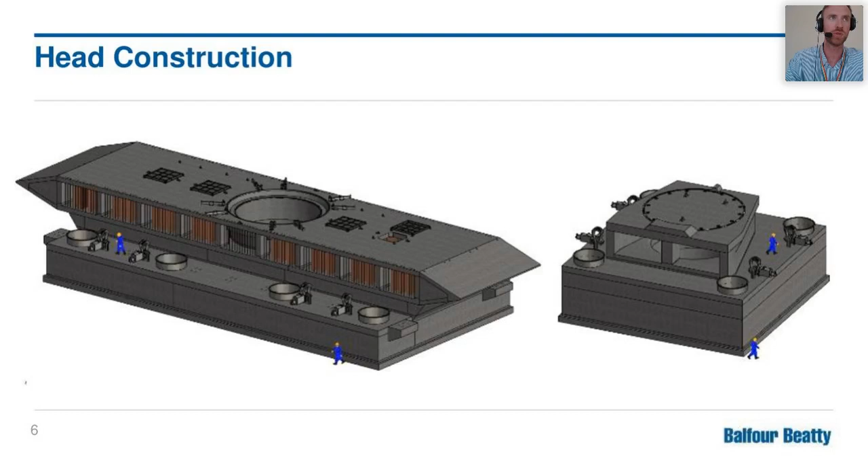So we just have the simple task of building these in the docks in a facility, and then picking them up and moving them 30 nautical miles and landing them precisely in position offshore in the Bristol Channel. Easy peasy, there you go. That's what we're here for.

Ultimately the head will sit on the seabed and the shaft will be drilled through and connect into the tunnel, which is being dug at the minute underneath the channel by a tunnel boring machine. And that will provide the source of water to generate power in the nuclear facility.

I like to tell everyone that it's the most important piece of the whole puzzle, because you can spend all the money getting everything right onshore, but if you don't get any water to it, you can't generate electricity. So I've got the most important job.

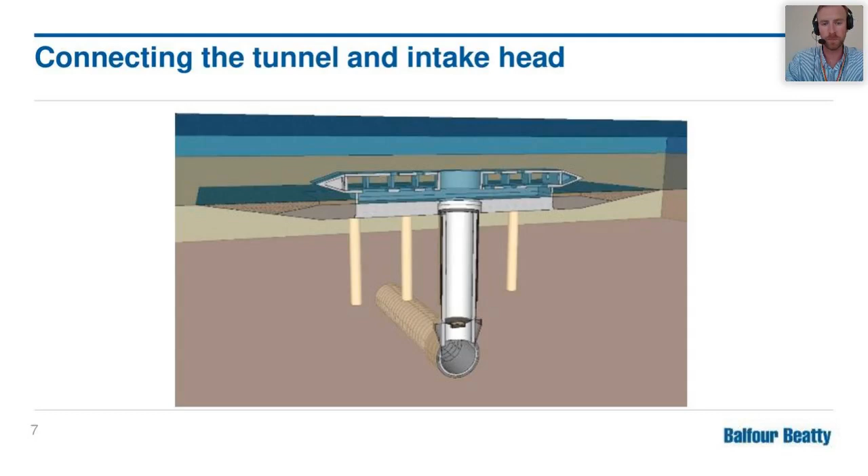What that information is telling us is the old-fashioned way of telling us how to build the structure. Really, from that drawing, we looked at it and thought, that looks difficult, but we can't quite picture what that is and how you build that. So straight away we were having concerns and doubts that the information given to us would allow us to even build the project to the desired specification.

So we went on a bit of a learning curve ourselves and employed some specialist companies to provide this information in a 3D format, producing a 3D model which allowed us to visualize the problem at hand.

It also allowed us to understand that these structures, the intake heads and the outfall heads, are individually made up of over 120,000 different components, which when pieced together all clashed with each other in up to, I think, 20,000 locations on the outfall and around 50,000 locations on the intake. So in effect, every bit of metal you lay down would clash with another bit of metal.

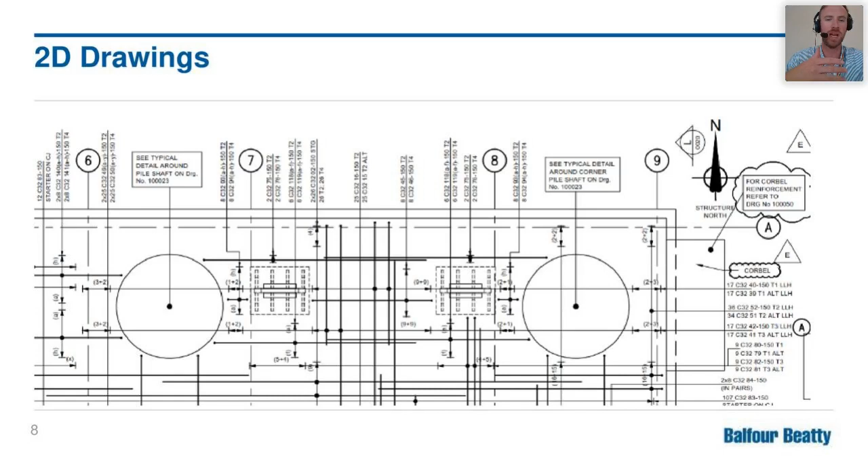So that is invaluable information. It is the first thing we did, which really helped us overcome the biggest challenge, which was making something unbuildable, buildable.

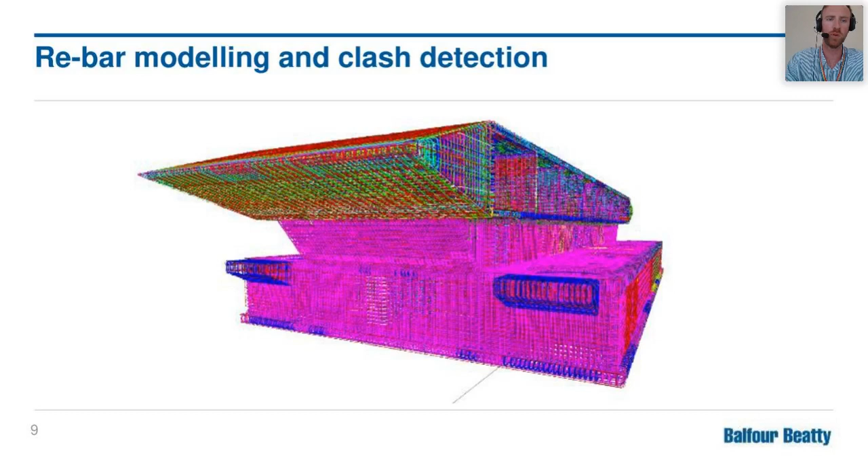So the 3D model has been produced. That's declashed everything, that's allowed us to make something buildable. We then produced a set of 2D drawings from the model, which were more accurate and fully reflected a buildable job.

This was so that the less tech savvy people, the older generation, actually had an opportunity to build the job - they were not too au fait with working from iPads and tablets, they wanted the more paper-based approach. But the model is there, and it's allowed us as a reference tool to help understand and visualize difficult parts of the job.

We've got big TVs on site, and all of the engineers and supervisors have tablets with them, with the model. So when all the drawings are laid out on the table and you can't visualize something, they just take the model, put it on the screen, and brief the workforce, showing them what it's going to look like when it's built. That's really very useful.

We have also made our quality assurance system go paperless. A normal office would have hundreds and hundreds of bits of paper stacked up on desks, which can easily be lost. We've turned this into... well, it's disappeared. That is non-existent now. That is archaic.

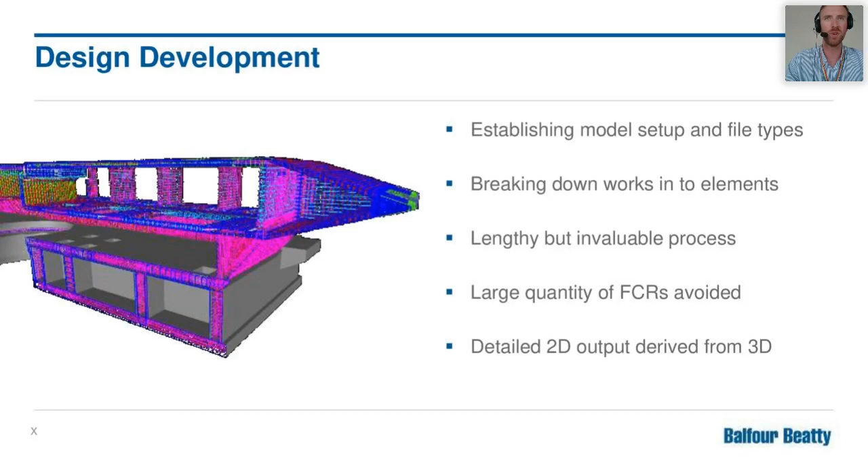What this did was avoid a large quantity of FCRs. FCR for us is some jargon we use, but it's basically a field change - every time you're building something and you come across a change, that's a delay, that's a cost. So by spending this money up front, we've really avoided delays to our program on site, and it has allowed us to successfully deliver large elements of the work to program and to a budget that we all believe in.

So on site, how does this all work? How does it come into reality? We've already said that the 3D model has been reviewed up front with the supervisors, and we've established how we're going to build the job - that's how we've designed it. From this, we can plan works most effectively. We can produce a program and stand by it, saying over the next few weeks we're going to build this floor slab, this wall, and this roof in this sequence.

Lots of desktop studies are produced - visualizations, fly-throughs, 4D simulations, and also paper-based items we call flick books, where you can almost flick through like you're building a Lego model or some kind of Airfix set, seeing step by step where you put this part. Part 1 goes next to part 2, part 3 goes next to part 4. I've never seen that before in any job, and it's very, very useful.

As I've mentioned earlier, the supervisors on site have tablets for visual aids, and we have site cabins with TVs so you can see the model as well. This is just a bit of an example of a flick book here.

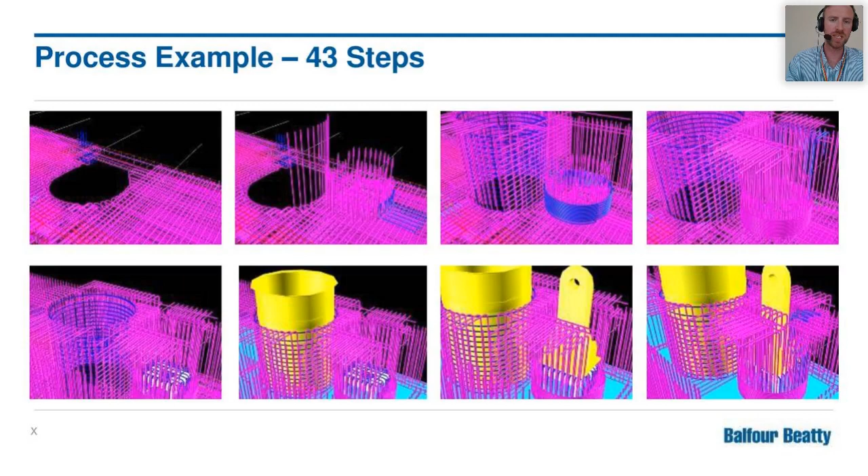So we've cut down the 43 steps into 8 steps, but this is a very complex bit of the works, and you might not really be able to see it too well on the screen, but there are hundreds of thousands of individual bars which all have to be pieced together here. The pink elements are rebar, reinforcement. Then there's some blue circular rings that have to go in, some more pink bars, then a large yellow cylinder that gets dropped in, and a large yellow lifting point. This operation would have taken a number of weeks, but we got this down to a number of days after using this flick book to explain it to the workforce.

We've covered some of this previously, but one of the key things to pick up is it's critical to have some tech-savvy people who understand the benefits of using this model and the possibilities of where it can go, and also to control it and control the distribution so people don't edit it, play around with it, or break it.

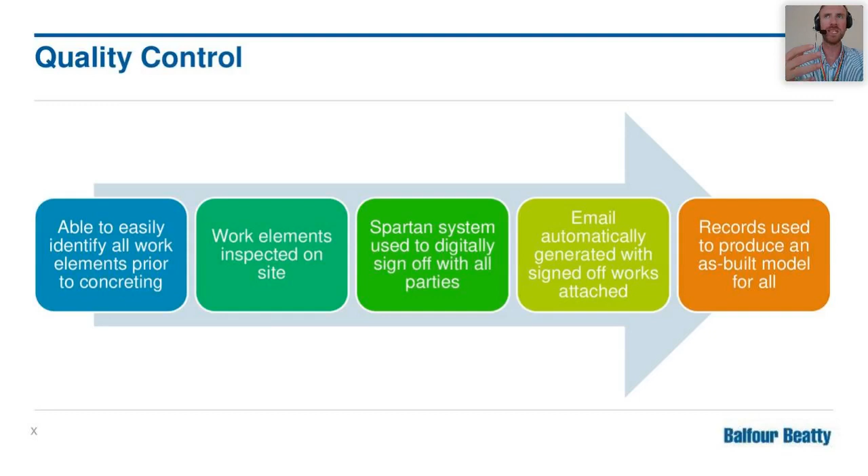The quality control side of things, which I've mentioned as well - we are using the digital quality assurance system, which has a bit of a step-by-step process, but this produces a suite of online database of all of our quality records, and from that we're able to produce an as-built of the model, a 3D as-built of what has been built, which can then be updated and supplied to the client. So this is how they as-built it, and it's kind of a step-by-step.

You can literally go onto the model. Once it's pink, that's what's going to be installed. You highlight everything in green, that's what you've installed, and then the model is updated and it's saved, and that's how it's installed. And then you can actually go through and check that there's nothing missing.

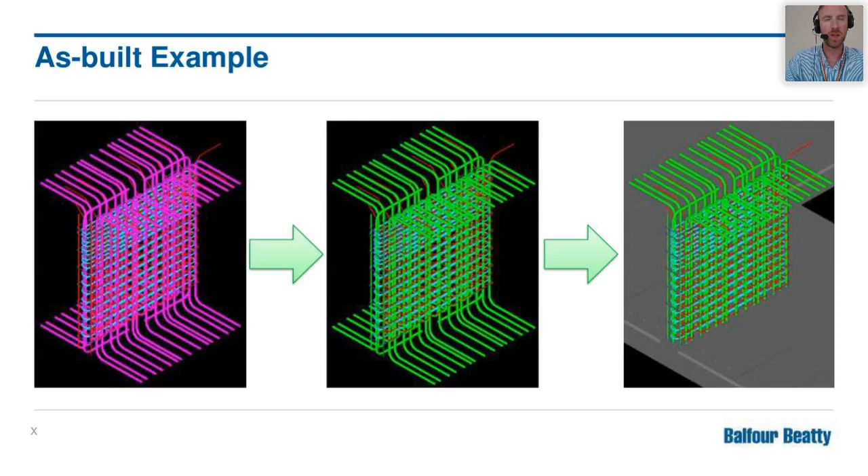This is very important when you've got 100-odd thousand individual components, because every time you install something, you literally click it on the model, it turns green, you save it, and you know you've installed everything. This ensures for us that we're not leaving any latent defects in the structure, which is very important for a nuclear project. We're not missing anything out, and we're not putting anything else in that shouldn't be there. So it's a very, very useful tool for us.

Once you're on the model, you can click onto the element that you've installed, and it will reference the quality check sheet from which you've signed it off on site. So this is another way for us to show a full golden thread of the bars being delivered, installed, checked, and then as-built. This is very useful on a nuclear job, which is very hot on quality assurance and record keeping.

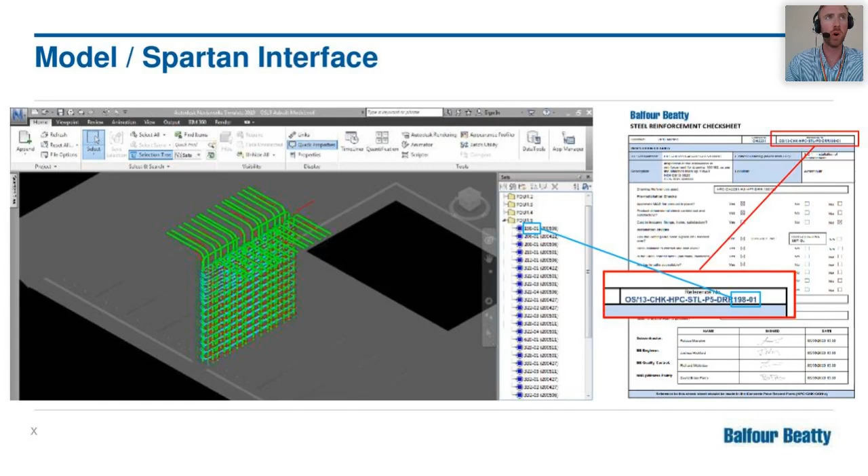So some further innovations. What we've found is we've had a 3D model which is in effect a dumb model - it doesn't move, it doesn't fly around, it doesn't have any simulations to it. But by using that in conjunction with other readily available products on the market like Synchro and Fuzor, we can add some life to it, and we can also use it as a planning tool.

This was flagged up on a 4D simulation 4 weeks ahead of us actually carrying out the works on site. So we realized we needed to adapt all of the temporary works so it didn't clash with our walkways, with our landing loading bays, and with other fixed items on site. This allowed us to do upfront planning to avoid clashes, which would ultimately have arisen on site and could have led to downtime, delays, and cost overruns.

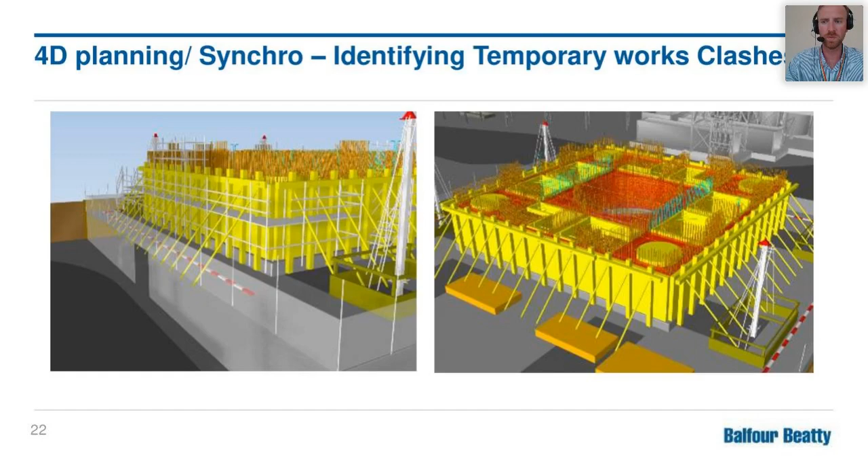So that's just a very simple visualization to explain that. We have also had some areas where there's been tricky access requirements. We obviously have to consider the health and safety of the workforce, and in some areas we were wondering how we'd get in to fix certain elements of the work.

So what we did was a lot of desk studies with 4D simulations to understand how a person could fit in there. Could it be done beforehand, so they don't need to go in there? We tried to run our program through a number of scenarios before building it on site, to avoid clashes, to avoid delays, and importantly, to keep people safe at all times. It's really valuable for that.

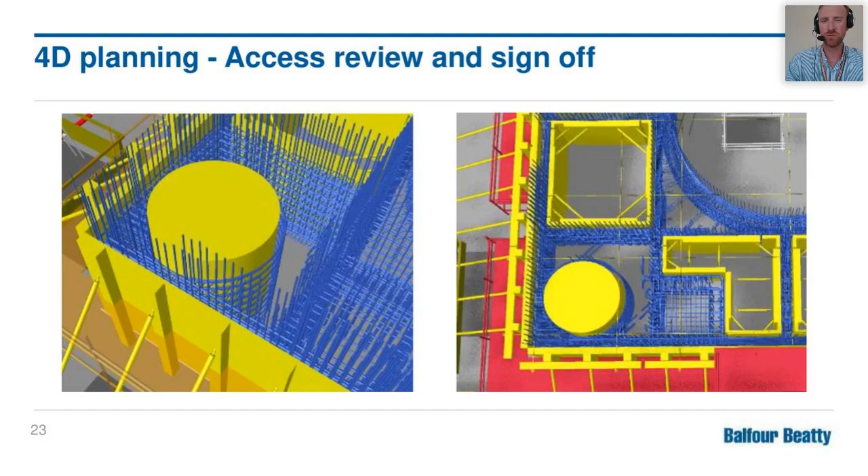This is another example, but one of the key things to wrap up here is we've also been able to use the 3D model and work with ground-based scanning equipment and drone-based scanning equipment to do remote verification of what we've built. Ground-based scanning is readily available from a number of different products on the market, and it can scan the reinforcement or what you've built to a very high accuracy, which can then be verified against the model, removing people from working on site.

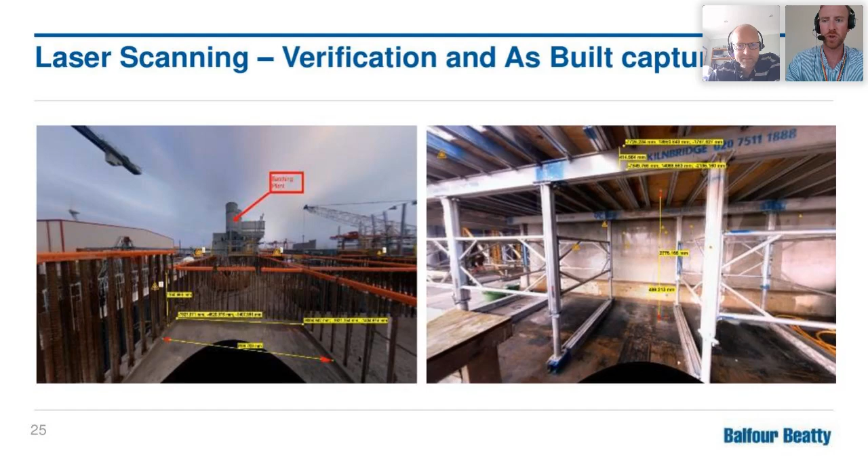That itself is valuable when considering the COVID situation. We've already had the ability to have engineers working from home, not having to come to site just to check measurements, because we've already got a laser scan which can be done with a drone and done remotely. So that itself is a new innovation for us, which we're working on, and I think it's the future.

I'll just go through to the summary, and this is just the last slide here. So to sum up, the 3D model is an extremely powerful tool. It's got a number of benefits.

We've found the outputs from it can be used by non-tech savvy people, but they do still like a 2D drawing to go with it. So having some young, keen and tech savvy individuals and giving them the trust is very, very useful, because they will actually go out, use the model, explain it to the older generation, and make things happen.

Digital QA is highly recommended, I couldn't be an advocate for it enough. Saves a lot of time, a lot of money. 4D modeling has proved very useful. We're still rolling it out in briefings, but we're trying to take it further and fully program everything using it to save us a lot of time and money.

There's great potential in using ground-based and aerial-based scanning technology to verify what has been built remotely, avoiding the need for engineers and staff to be based on site, which is particularly of interest in the current new normal we have here. That for me is it, and I think I'm about up in terms of time now as well. Hopefully I've covered everything, and if there's any questions, great to hear them.

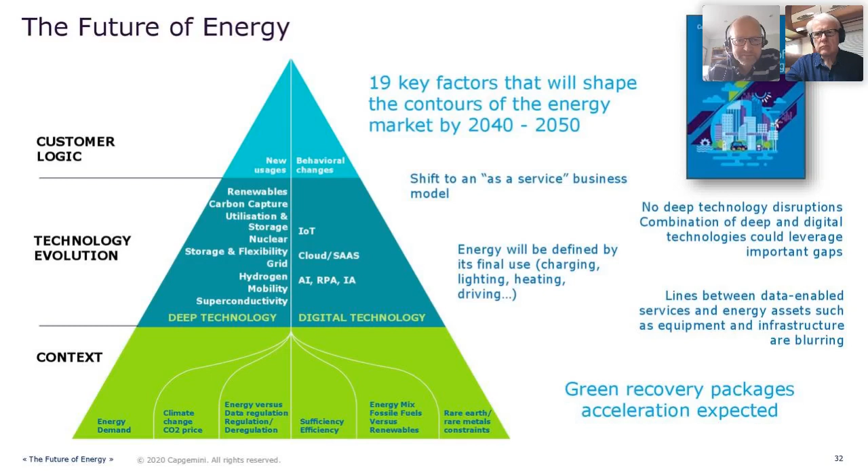Very good, I hope you can hear me. And first of all, thank you for inviting me to be part of this. I'm Gary Carroll, I'm the founder of Episensor, and it'll be a challenge to talk about Episensor in 5 minutes, but let's see what we can do.

So Episensor provides industrial automation using a wireless Internet of Things, industrial IoT platform. Much more difficult than actually designing the products when the company began, finding our position and how we deliver value to our end customers was a huge challenge. So we realized that for the past 40 years, major automation companies that we all know well, the global giants in this area, such as Honeywell, Siemens, Schneider, and Emerson, and so on, have actually done a fantastic job, and they've set the gold standard for how this should happen in terms of accuracy, ruggedness, reliability, security, and large-scale deployment.

And when you move to industrial IoT, it's very important to say that you're not making a compromise, that you're not losing some of what has been available, whereas you might be gaining some flexibility and so on. So we've taken the approach that the gold standard set by these companies over the last 40 years is our starting point, and that you should lose nothing but gain from a different approach. So in a sense, we're not doing anything new from a technology point of view. We're still measuring the same things and so on.

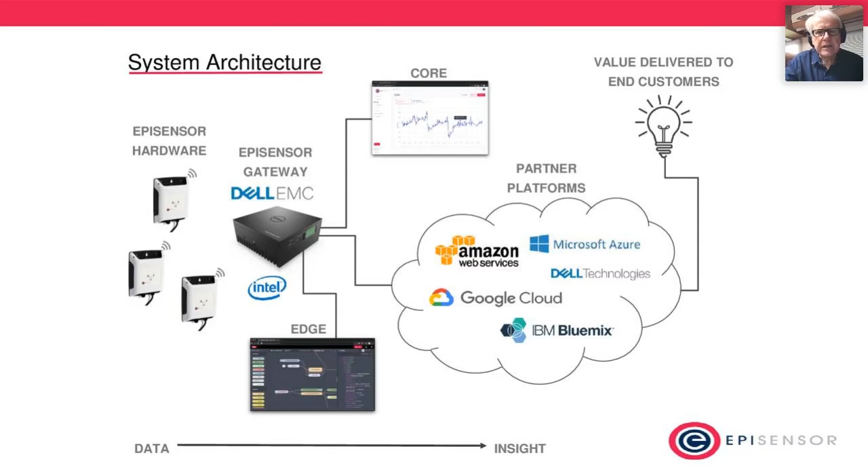Okay, so this leads to our architecture. And the architecture, first of all, from left to right, goes from raw data, which is practically worthless, to a valuable insight where you can take an action and actually release value from a system. We start with our hardened devices out there in the field, beyond the edge, as the IT people would call it. Then we go to a gateway, which uses Intel technology, delivered by Dell, and we go to the cloud, and eventually an insight is actually generated.

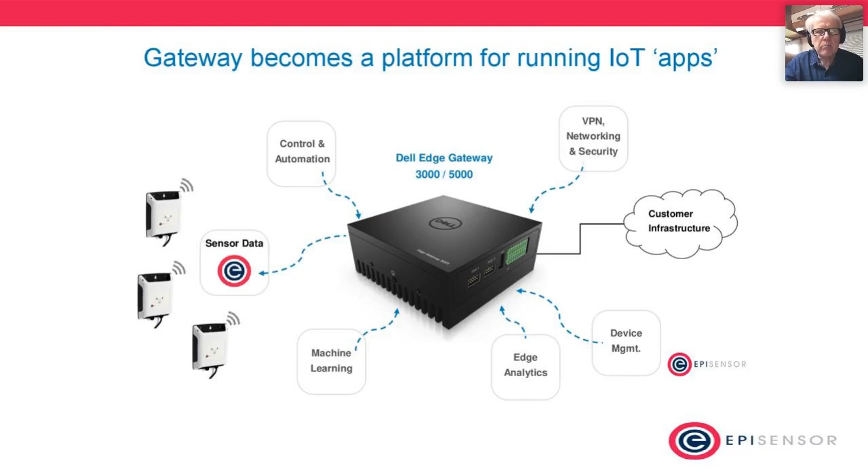So the gateway, with a focus on the gateway, it has communications technology. It is a full computer platform in its own right, and it's actually a compute platform that can be used by our clients as well as ourselves to deliver a solution. And then we have a plethora of what we call battle-hardened wireless devices, which we can deploy very flexibly and very easily.

In the context of COVID, we discovered that the Far East, Taiwan and Singapore were some of the first to recover, and it actually generated very considerable business for us. We also have clients who self-install the equipment, and those contracts would not have been won by us but for the presence of the virus.

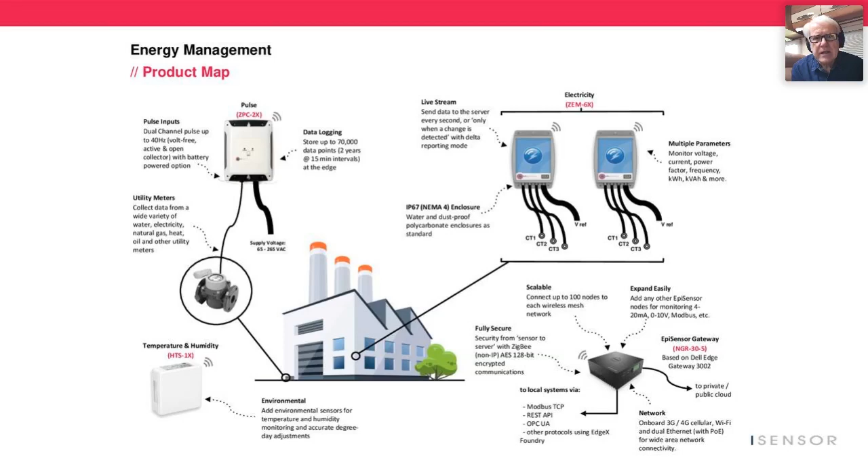So to give you some customer examples of what our partners are building: energy management, probably the largest industry in the world, is an important place for us to play, and it has changed dramatically in the last decade. We've got a full range of devices for measuring electricity, gas, and other utilities, including water and heat flow, bringing those to a gateway and then to the cloud for full insight.

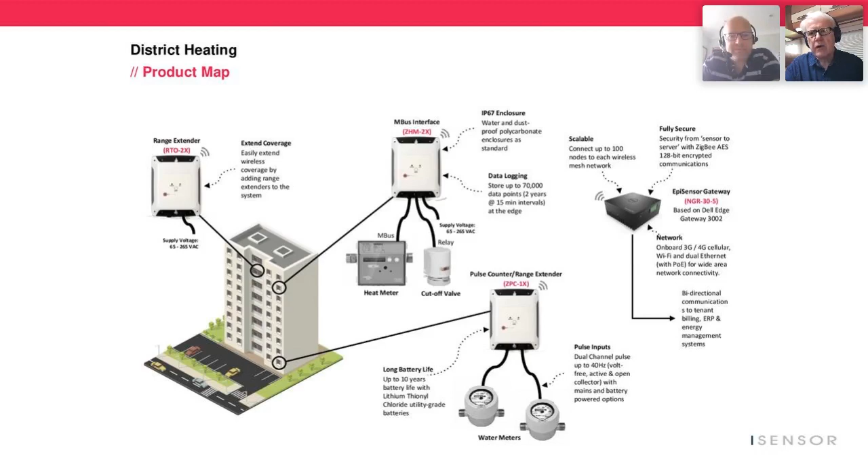Heat production and heat consumption and the charging for it is another very important place. Refrigeration monitoring is significant too - refrigeration accounts for about 65% of the total energy costs of a supermarket, so it turns out to be a really big load.

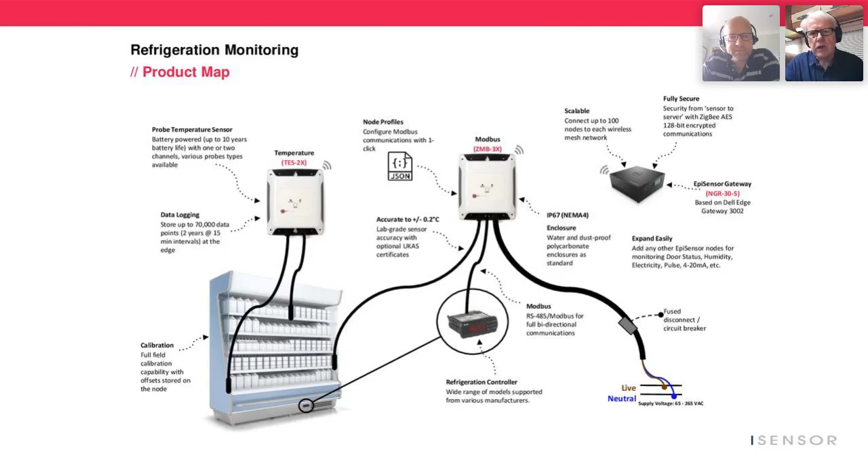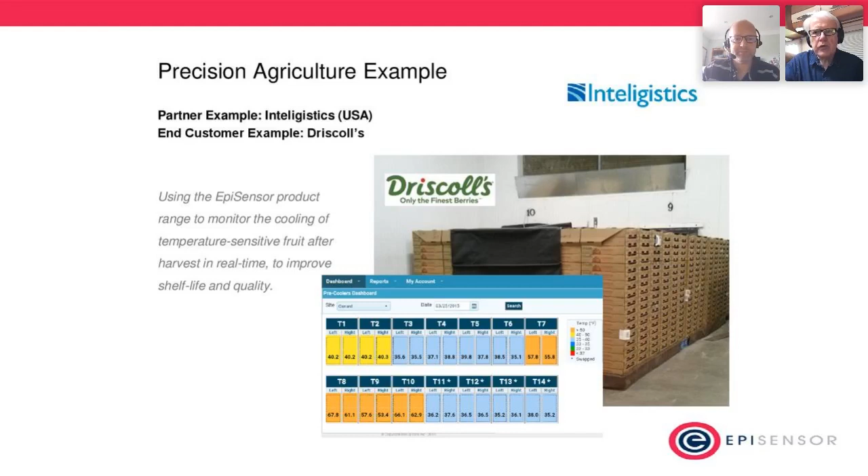Production monitoring is very interesting, and you wouldn't expect IoT to play there, but we have a number of very large opportunities in this particular area. Then precision agriculture - the photograph shows the production of berries in California, where they're taken in on a warm day and actually cooled to a particular formula.

Demand response is an area in energy where we can shed load or bring in standby generation or batteries to complement the grid. This is a huge area of growth for us, and we believe we're the world leaders in this, delivering it literally all over the world, with the biggest virtual power station in a number of locations.

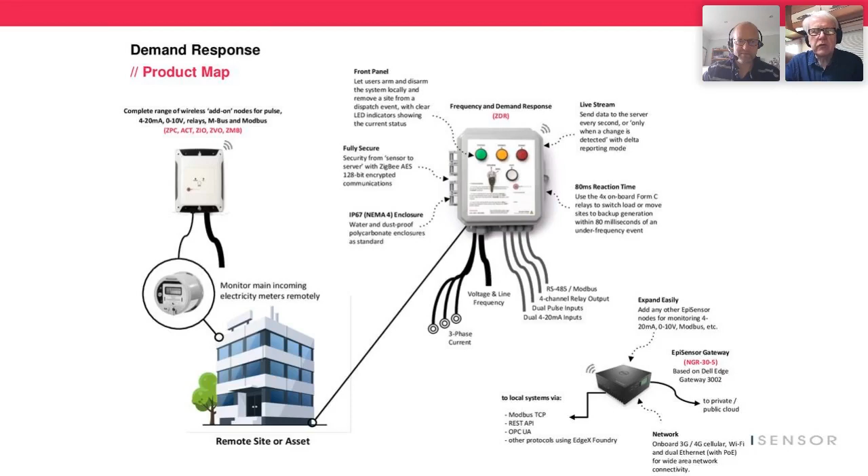We have a number of significant announcements - for example, Dublin Airport can move to standby generation, using our boxes to completely go off grid, with partners in this like the EirGrid in Ireland or the National Grid in the UK and so on.

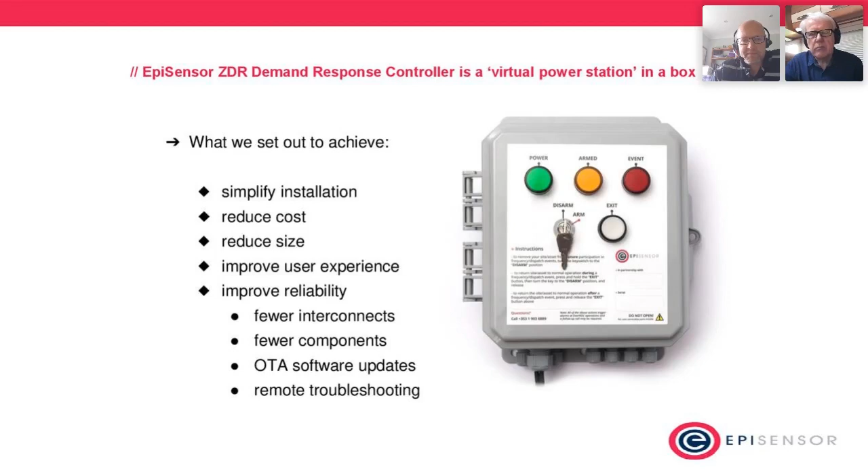That's a look at the particular box that we use, and we think this box is replacing something between 10 and 15,000 pounds of equipment down to a couple of thousand pounds. So we're actually revolutionizing this whole area.

If you have large installations, new things happen. First of all, you can use the same platform to layer one application on top of another, and that's where huge value is actually released. An IoT system allows you to do that.

Then when the number of installations gets really large, you get a second wave of data - not the data you're interested in, like temperature and humidity, but actually metadata for all the bits and pieces of hardware that are out there. And so when you reach a certain scale, device management becomes really important.

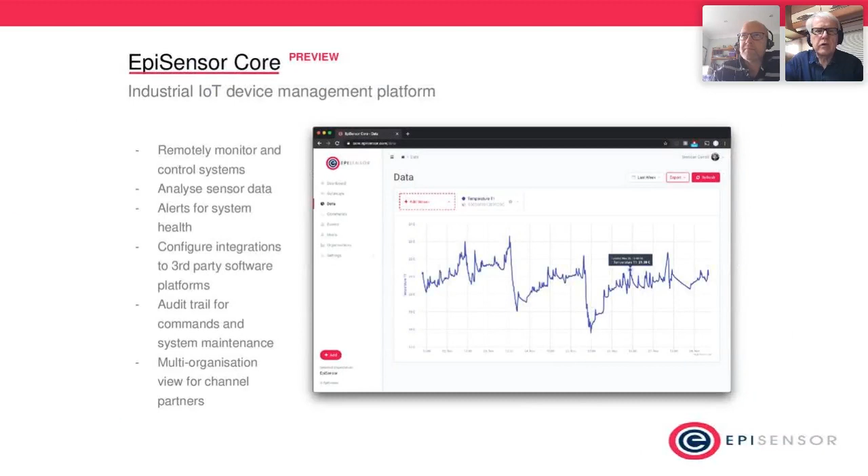So we've introduced a device management platform called Episensor Core and Episensor Edge, which allows you to do this right out to mobile devices, enabling commissioning remotely in any part of the world. This will allow something we might call in the future a courier install, where somebody with no knowledge can install a completely new system.

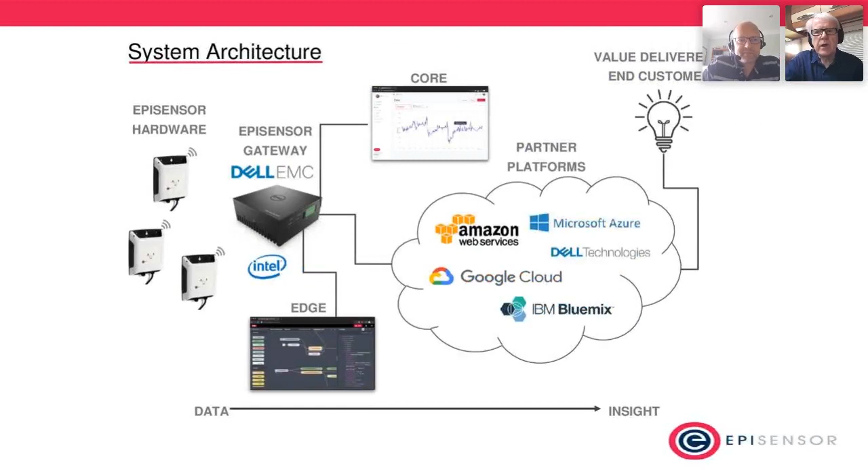Thanks, guys. Really appreciate the opportunity to be here today to talk a little bit about what we do and some of the solutions. Essentially, we are deploying for customers.

So a bit of background about Hark - we're an energy analytics industrial IoT company specializing in helping businesses connect, monitor, store, and analyze data from all these different assets. We go in and connect to industrial systems, PLCs, existing infrastructure, and BMSs for companies in order to gain insight and automatically control these assets.

In terms of the kinds of solutions we're seeing, especially over the last six months, this technology is helping because people are now remote more often than not, so having remote visibility as well as control capability on core assets is becoming extremely important.